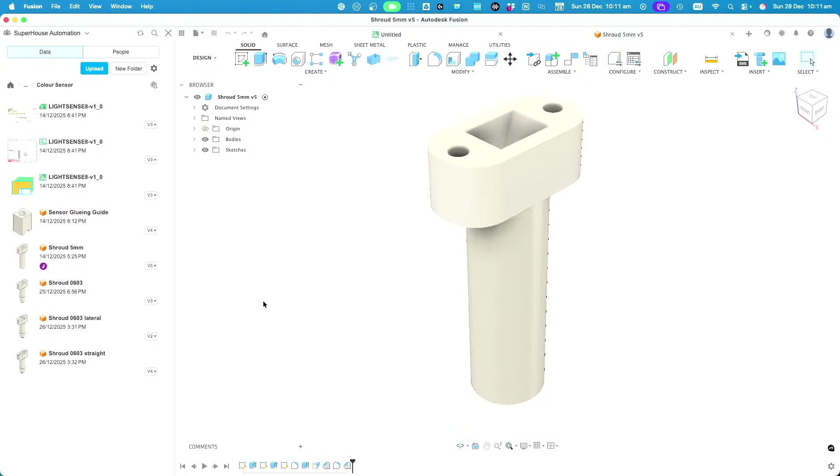Now let's see if this is going to work. I've got to remember how to drive all this stuff manually now that my magic buttons don't work. Okay, I'm going to go to that and hopefully, oh yeah, I think you can still hear me at least. And that. Which doesn't really work very well as a picture-in-picture, but oh well. With no scripts, that's the best we've got.

Okay, so I saw that there were some other comments back there. Wagon Load says, would a PGA work as a test point bridge? Programmable test point switchboard. Maybe? Oh, yes, I saw Wagon Load ask the same thing earlier and I missed it. PGA, so Programmable Gate Array, I think that stands for. Is that correct? Let's see. I'm going to check. Oh, FPGA is field programmable gate array, yeah, but what about just PGA? Is a PGA different to an FPGA? Maybe it's just the same thing. Yeah, okay.

Googling PGA just gets golfing sites. Yes, I know. Oh, programmable gain amplifier, says Tabraze. There are so many things it could be. That is what I'm talking about, said Wagon Load. Tinker says FPGA is field programmable. Yeah, but are there any that aren't? Maybe the original PGAs were not field programmable. They had to be done at the factory, maybe using a mask or something, and it was only later that they became programmable after fabrication. Anyway, what am I doing?

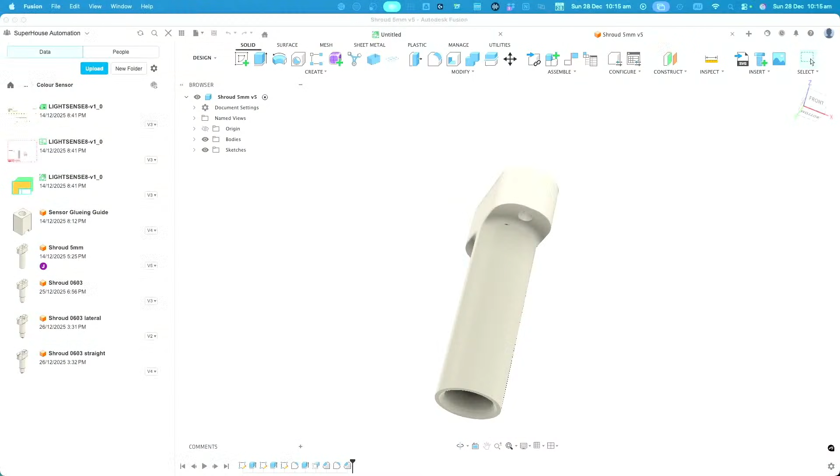Oh, okay, so Tinker says, original PGAs were like original PROMs, took fancy gear and voltages. So you'd need to use a high voltage programmer or something to set them. Paul, good morning, Adelaide. Wagon Load says, use PGA to make a software-defined switchboard for test points to choose which test points to route. Okay, this sounds like a far bigger rabbit hole than I want to chase in my current hazy state of mind. So I'm going to stick to the simple stuff, the things that my puny brain can comprehend.

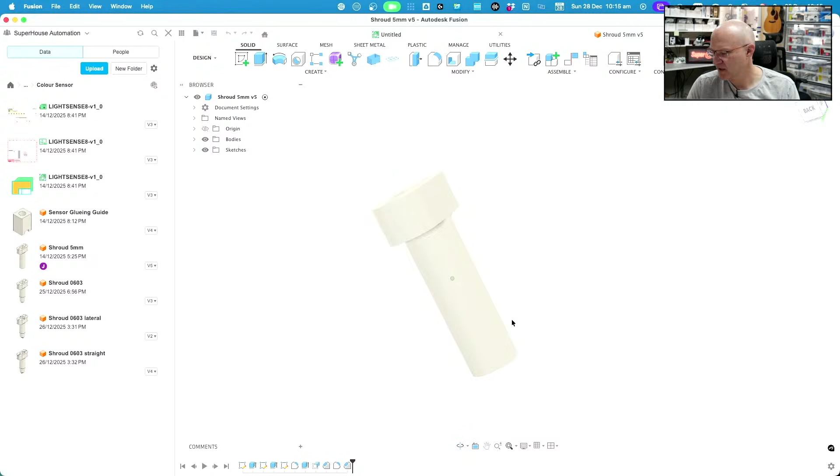So this is the test shroud for a 5mm LED, and this seems to work fine. So this is what we were using last week, and we were getting data out of the sensor. And since then, hang on, I need to mute for a second.

Bad. Overnight, my chest infection thing seems to have come back, so I've been feeling really rotten today.

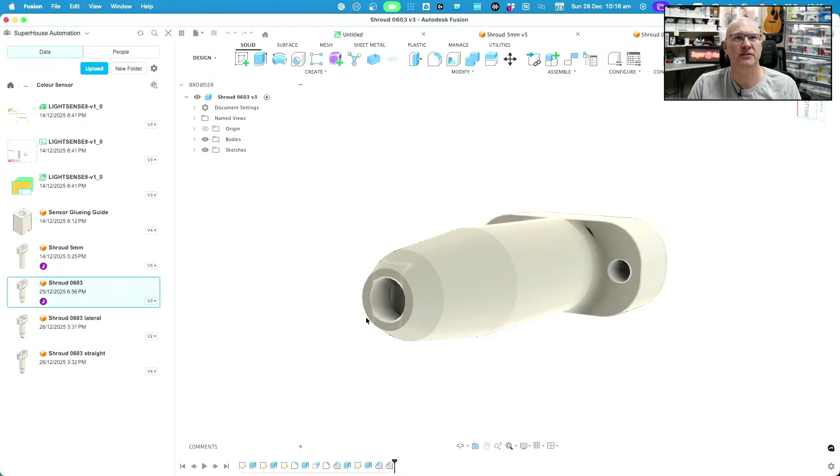So I then did this, which was a bit of a failure. Well, it would probably work. So this was my idea of making a shroud that would go over an 0603 LED. And I've printed a couple, I have right here. The problem is that what I was trying to do was make the geometry big enough that this circle will encapsulate an 0603 LED in any orientation.

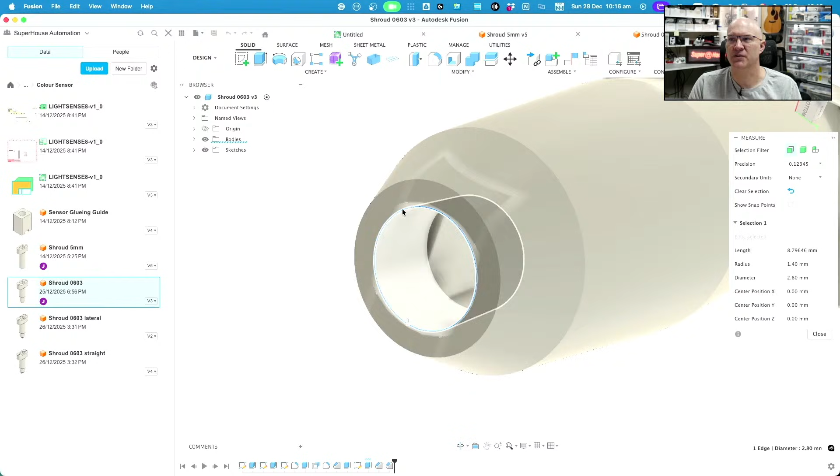So if we have a look at the diameter of that circle, it is 2.8mm, and then just in order to be able to print, this can't be super thin. The end point here has to be wide enough that the nozzle of the printer can do a perimeter or two around it. So I couldn't bring this in much closer. This is basically at the lower limits of dimensions of 3D printing with any degree of a clean result.

Beyond this, it just becomes a bit of a mess, at least with normal FDM printing. With something like UV cured printing, resin printing, you could get finer features than this, but this is getting down towards the limits.

So I did this, I printed a couple of them, and then I did some test fits onto a PCB. So I have a PCB here, and I'll show you what I'm thinking about how to do this, because my normal process of just hitting a button and getting the correct camera does not work. So how am I going to show this? Right here is an LED. You can probably just see it between my fingers, right there.

And next to it is the current limiting resistor, which is associated with the LED. Now, this is not a very dense board. There's plenty of space, but the current limiting resistor and the LED are right next to each other. What is the spacing on those? Not particularly large, not tight. Looks like it is on 2.5 millimeter spacing, approximately. Yeah, 2.5 millimeters. So the LED and the resistor are side by side, parallel, 2.5 millimeters apart.

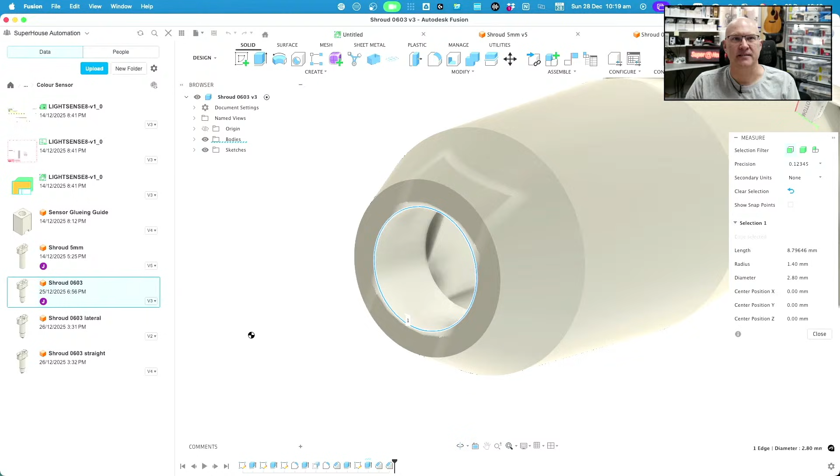And that's pretty normal on a board layout. If you have an LED, it's not going to be sitting in total isolation miles away from anything else with plenty of space around it. There will typically be other parts near it. And that means that if I'm going to put something like a light sensor with a shroud that descends over the LED and blocks it off, then it needs to be able to clear adjacent parts. And this doesn't. It kinda does.

Austins_creations said, you either need a resin printed part or TPU to help squish, seal. Yeah, potentially, Austin. Yes.

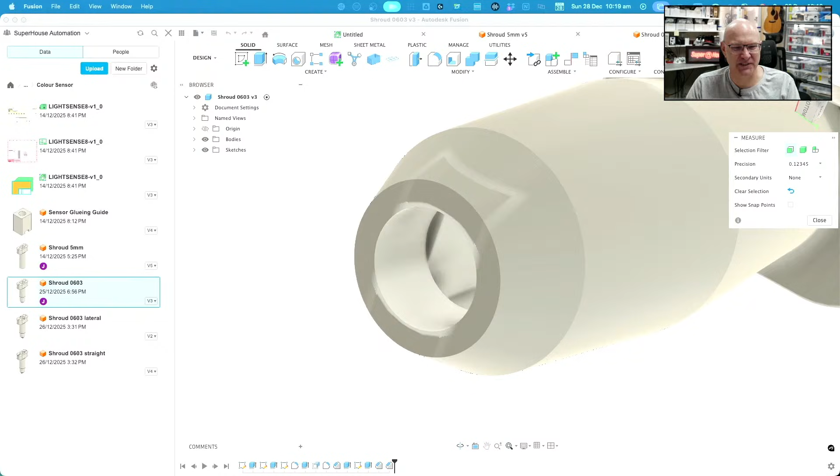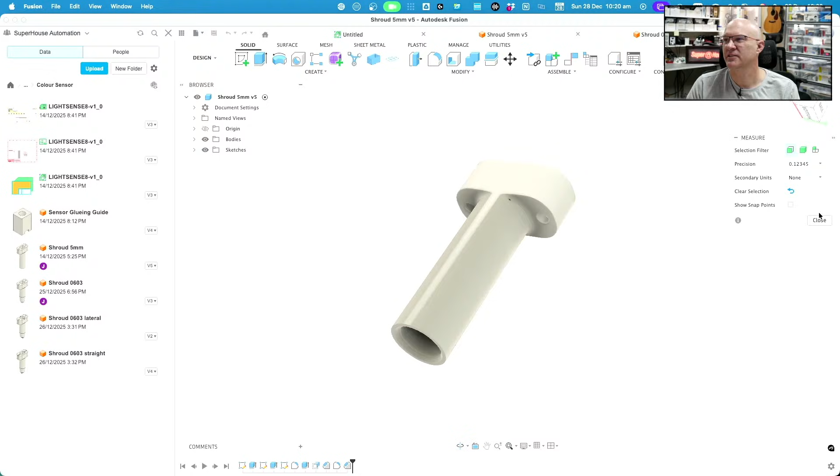So, where are we? Okay, so this was the progression. I did a test print of this part, and it does actually work. It fits over an 0603 LED, and it brings the sensor down. Now with this one, do I have a section analysis on it? No, inspect. Let's see, section analysis. Actually, no, cancel, I'm going to do it from the other way around. I want a section analysis on that axis. Okay.

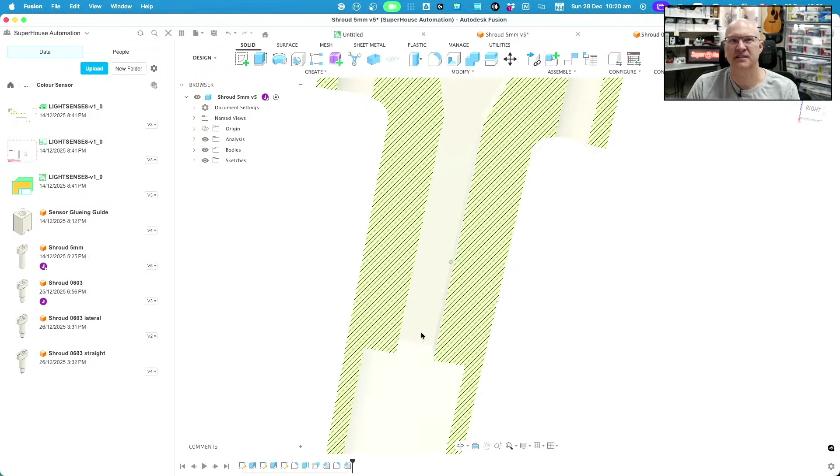So, what you can see with this one is the cable comes down from the back, and then the color sensor sits in the bottom of this cavity. The top of this is where the LED comes through. So a 5mm LED goes into this hole. It has a curved top, and the top of the curve ends up approximately where my cursor is, so it fits into that space neatly. The sensor goes just here, and that's why I have this gluing guide. I'll show you this as well. This gluing guide has a spigot sticking up on the inside.

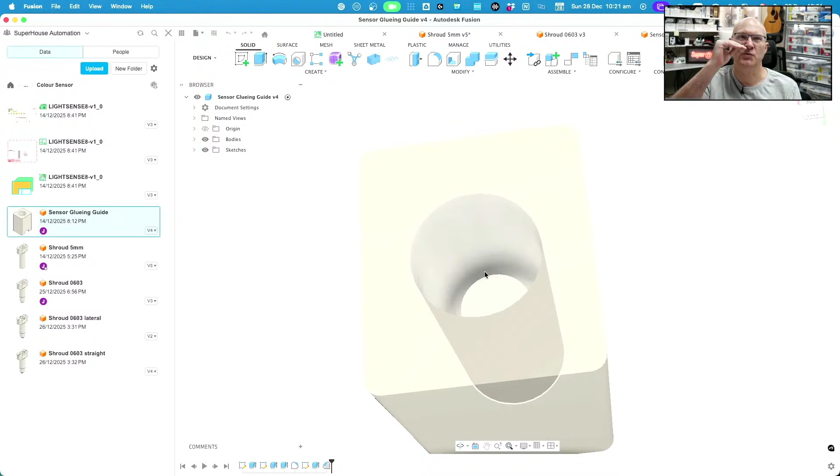So I printed one of these, and this shroud gets inserted into the gluing guide. That spigot goes up inside it, and it goes to where the LED would be, so it blocks off the hole for the LED. And then I can put the sensor down in here, and I know that when it hits that stop point, it has reached the end. And then I can put a bit of glue on the wire, and the sensor ends up in the correct location right there, because there's nothing else to stop it.

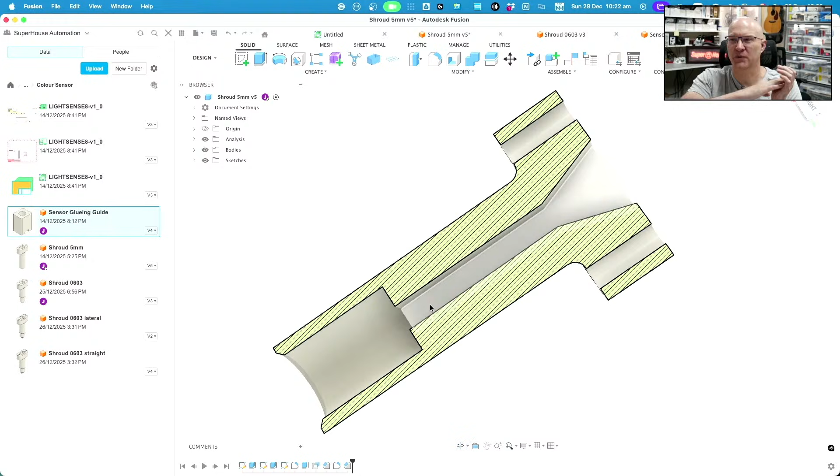Otherwise the sensor can just keep going straight down and end up in this area somewhere. Or I might not put it down far enough, and it might end up here somewhere, which would probably still work, but I just wanted a really consistent way of making sure that when I put the sensor into the housing, it ends up in the exact same place every time. So that's why the gluing guide provides this face. That face right there is what goes up inside here and acts as an end stop for putting in the sensor.

Very similar, yes. And ultimately I do want to do this with optic fiber instead of putting the sensor directly in here. But that is for a future iteration. I'm doing this in multiple stages. The first stage is to take the sensor and put it directly over the LED, but that means having a cable running down to it, and it means a shroud around it, all sorts of things. So ultimately what I want to do is make a little test module which will have a number of these sensors in it, probably 8, and then have optic fiber that goes to a shroud that goes onto the location of the target LED. The other end of the fiber goes up to the sensor, which will be in the centralized location.

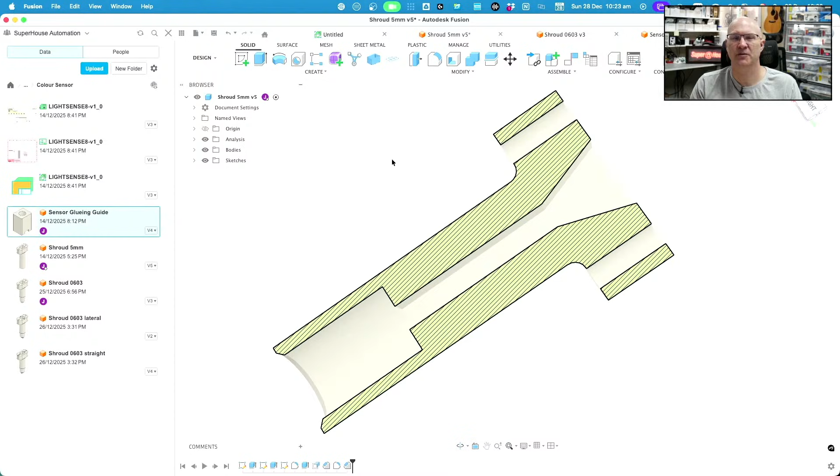Wagon Load said, would a fiber optic cable help direct the light from the LED? Yeah, exactly. That is the plan for the future, but that adds a whole lot of uncertainty and complication. So I am dealing with the simple case first, make this work, and then I'm going to start complicating the mechanical optical side of things.

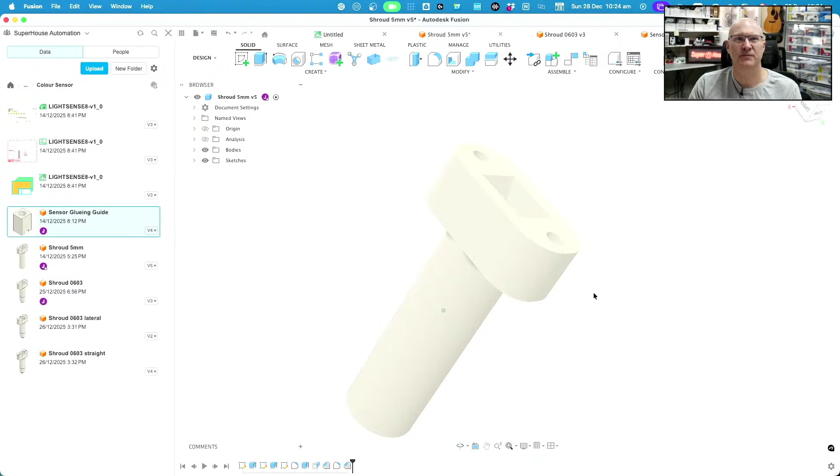So this version seems to work really nicely with a 5mm LED. So a round 5mm LED into this works just fine. And yeah, we had the software working for that last week, which is great. And this one, you can see that this whole thing is significantly smaller, because it's going over an 0603 surface mount LED, it's not going over a big 5mm through-hole LED. So this end is much smaller.

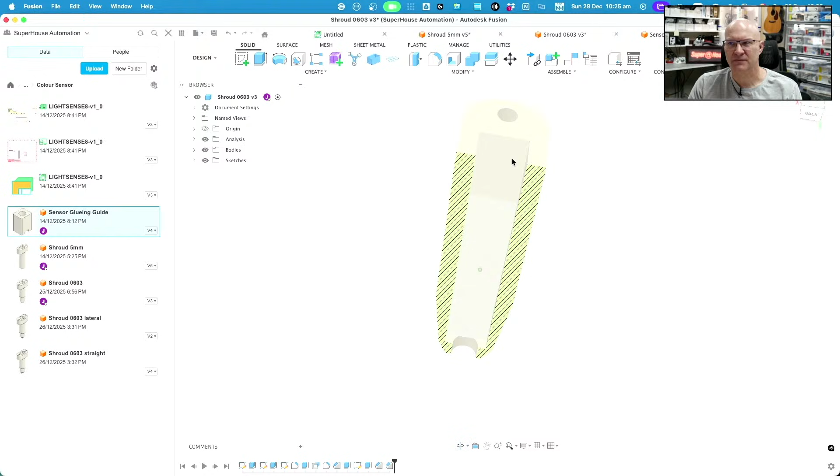The sensor, which direction should I do an inspection? Let's go that axis. Yeah, you can see that there is a flat point at the end here because the sensor is bigger than the 0603 LED. So it sits in the bottom. So what I'll do is put the sensor down with the wire attached to it until it hits the end here. It'll just sit against this little lip. The sensitive part of the sensor is in the middle of it. So it will then be exposed to this hole and then it can be glued in place. So that's the theory for this one.

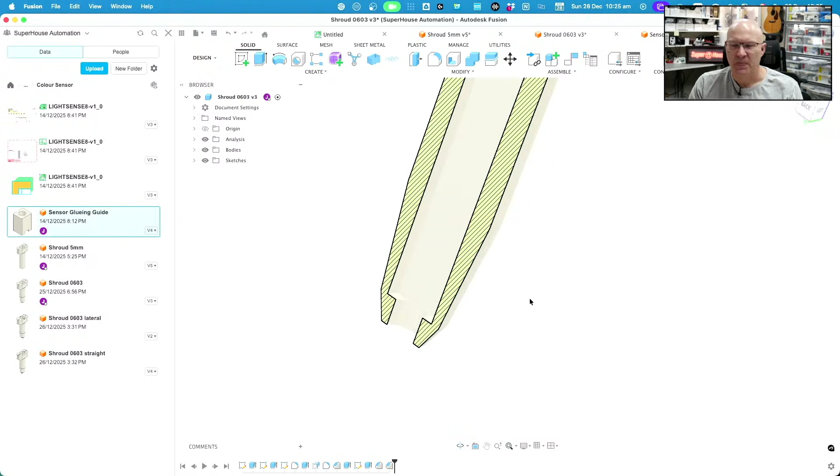Yes, but it just ends up being too bulky. Hang on. Sorry, had to cough and take a drink again.

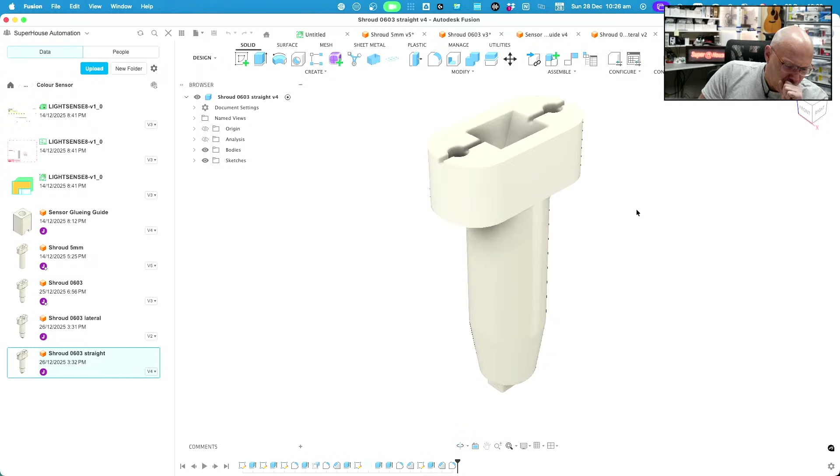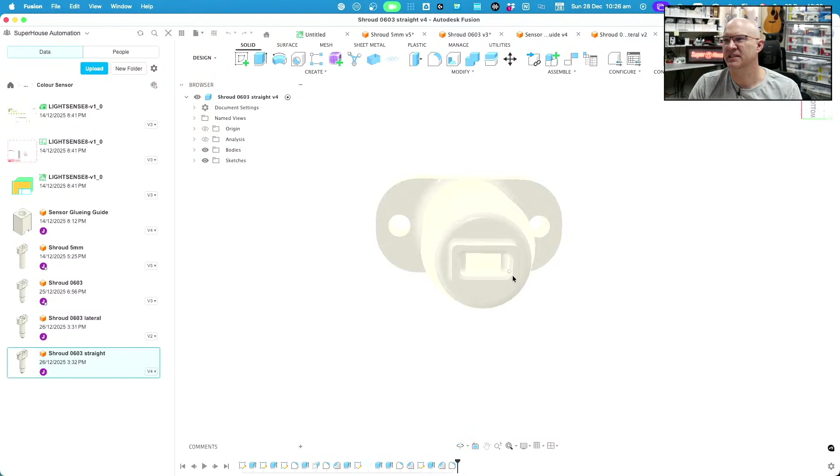So, this was a little bit of a failure. It would work if the LED was quite isolated and it wasn't near anything. But that's not reality. So I did 2 more. I did a lateral and a straight, and you'll see why. Whew, not good. So, instead of trying to make a round aperture that will fit over the LED in any orientation, what I did was specialize the orientation. So I have this one where the LED is aligned with the mounting holes, and you can see that it just goes that way. And then I've got this other one where the LED is perpendicular to the mounting holes. They're basically the same thing, but this aperture is small enough that it just fits nicely over an 0603 LED with a little bit of a gap.

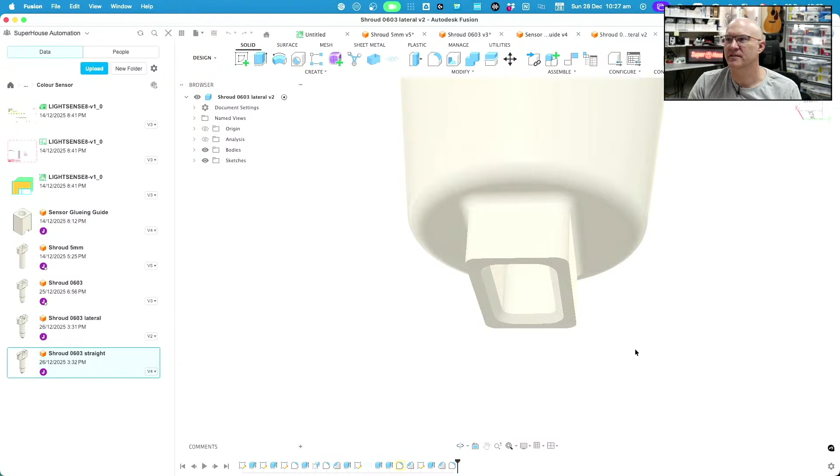There is a slight chamfer on the inside edge so that as it's going onto the LED, it'll tend to self-align. If it catches the edge of the LED, it shouldn't just sit on it. It should sort of skate off the edge and self-align to some extent. That's the theory anyway. And you can also see, this is a little bit of a silly thing, but yeah, I think it'll be helpful.

Tinker001 says, but what will you do for an array of 0603 LEDs? Oh yeah, that's going to be an issue. I haven't got to the ability to solve that yet. At this stage, it would probably require a custom shroud. So some kind of a shroud that has 8 sensors in it, or however many are required, and sits them all in the correct location. So it would be an array of sensors with an array of apertures custom made for that particular target device.

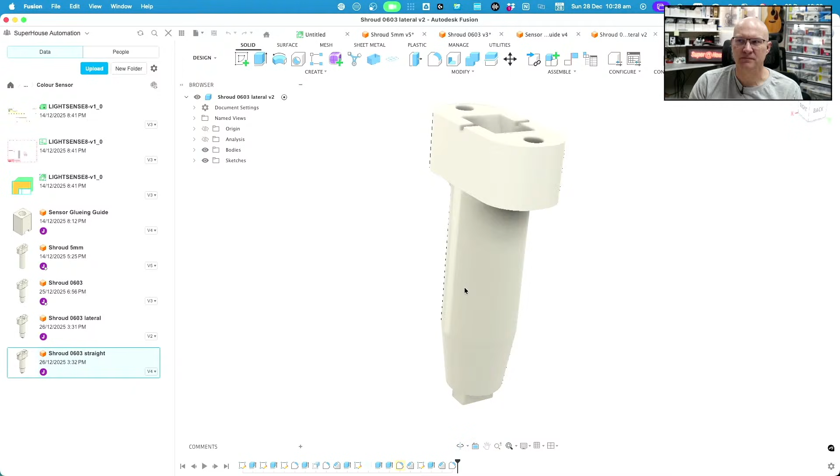But ultimately, I want to be able to do that with optic fiber. But for now, I'm not jumping straight to the end goal of the most complicated situation. I'm trying to solve the simple case, and then once I've solved the simple case, I can then start to expand and generalize it a little.

Yes, and as Tinker001 said, except that the sensors are much bigger than 0603. Yeah, they are, and that is the point. If I have an array of LEDs that are side by side close together, that is the point where I will need to use optic fiber. But I'm not there yet. I've got to make the basics work first.

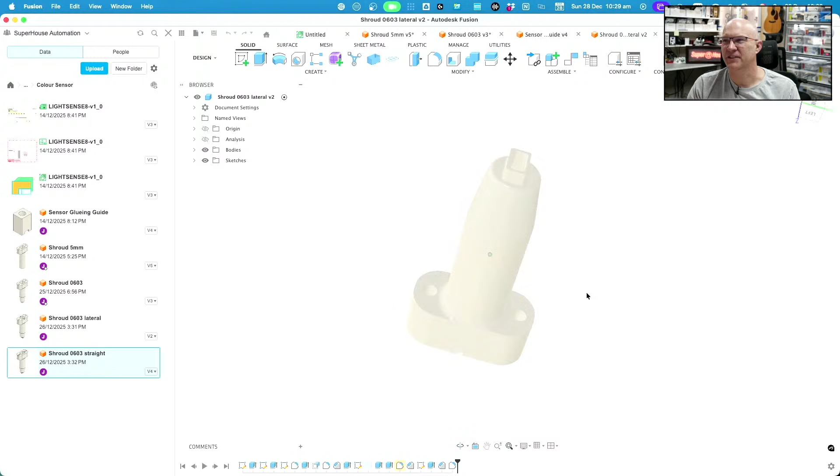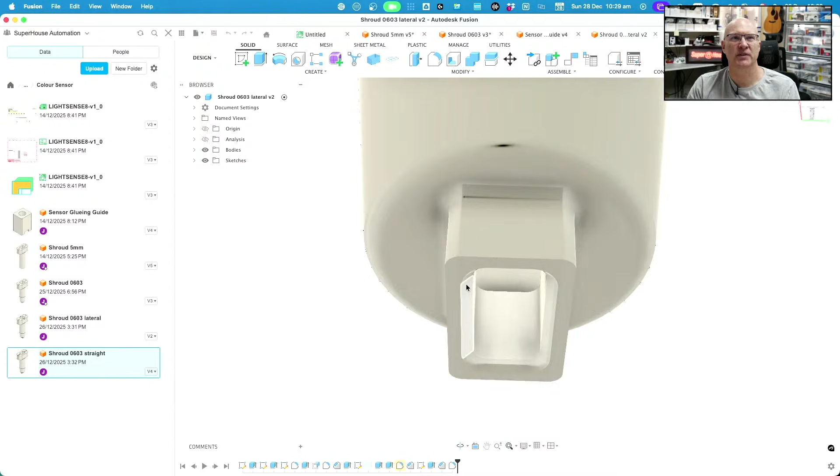So the thing with this is that because the body of the shroud is rectangular, it fits, not super tightly, but directly around the LED. If there is a resistor and an LED in parallel, directly side by side, the thickness of this side shroud is small enough. In fact, I don't even remember what it is. From that face to that face is 0.5 of a millimeter. So you can see the scale this is.

It's pretty small. To be 3D printing this, it's down at the lower limits of FDM printing. So 0.5 of a millimeter thick on those walls, which means that fillet is something like 1/4 of a millimeter across. And that is narrow enough that it will fit in between the LED and the adjacent resistor. So this will solve the problem. In fact, I'm going to come back to test modules, and test module, TMod, is it this one? There is one I was messing around with, module plates, yeah.

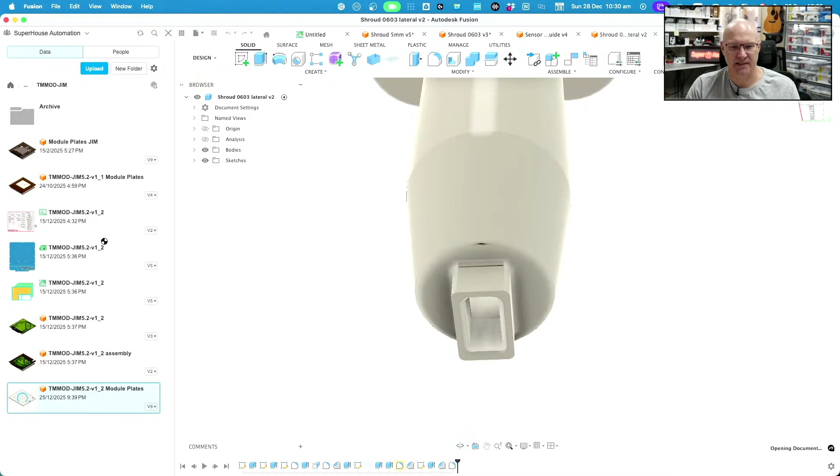Build them out of HDPE. HDPE? Make the LED shroud as a separate rotating end piece so you can rotate it to any angle. Yes.

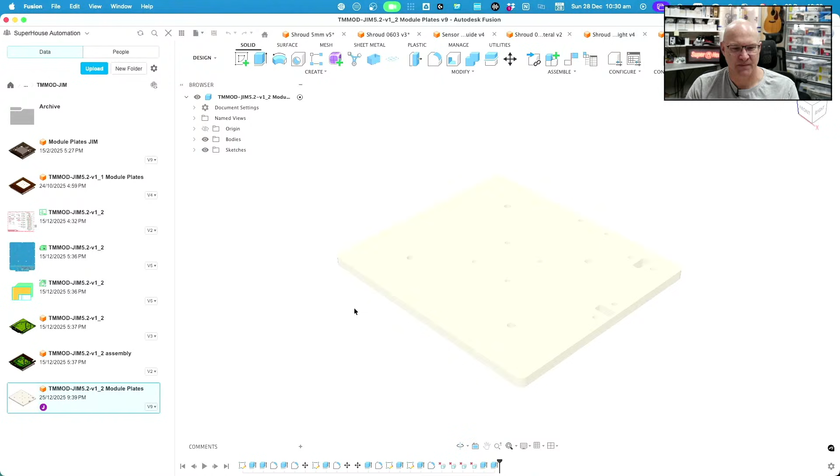Out of HDPE. Mill them. Yeah, that's true. I could mill them. So this is the pressure plate for, well, you're not really going to be able to see it properly, but for this board. It's the one that I've been using, this board actually, one of these. This is the one that I have been using as my test case.

So if I want to make it work for this board, that gets me to the starting line of having one board where I am testing an RGB LED and a regular LED. So there are exactly 2 LEDs on this board, and if I can cover the big 5mm RGB LED and the surface mount 0603 single color LED, that's LED sensing 101. It gets us to the base point and then I can start expanding from there.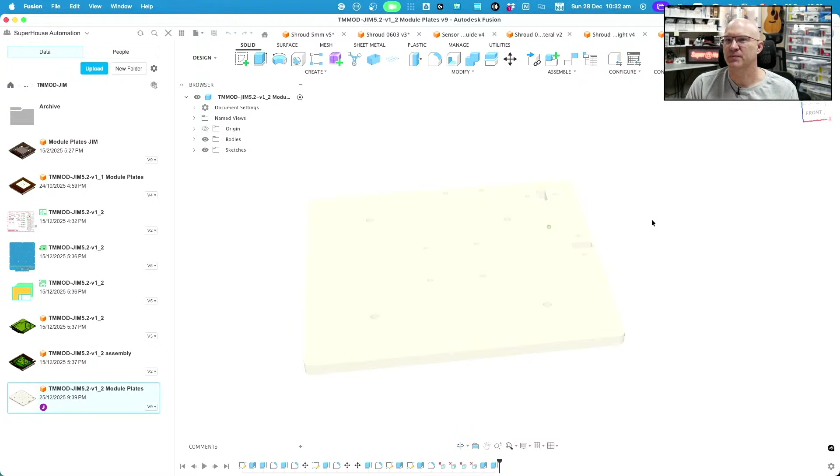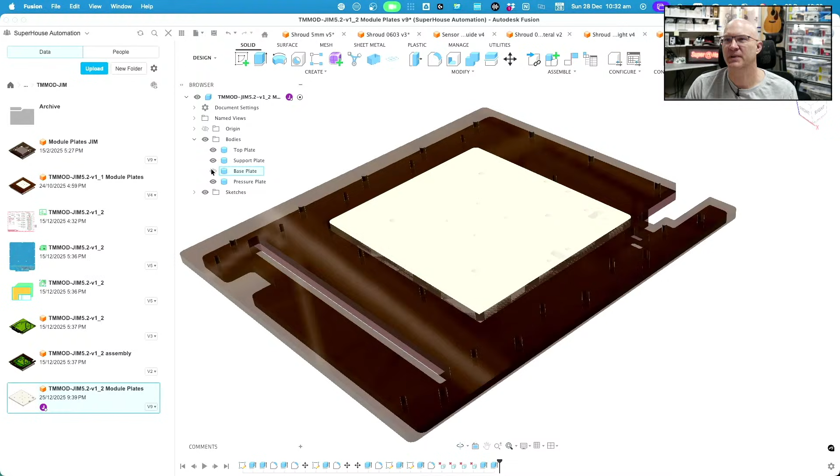So what you can see on this pressure plate, in fact I'm going to turn on, where are we, bodies, turn on a couple more pieces for it. So this white piece that you can see, this is the orientation of the test module. You can see the top plate, the middle plate and the base plate under there. I'll turn off the base plate and the top plate just to make it more visible.

So the pressure plate, that's interesting. Oh no, that's fine, that's fine. Sorry, I just saw the tab on the support plate coming in, intersecting where the sensor is going, and I had a momentary heart attack. But no, that works fine because that sensor is under the PCB and it doesn't obstruct anything. So that's cool, I think.

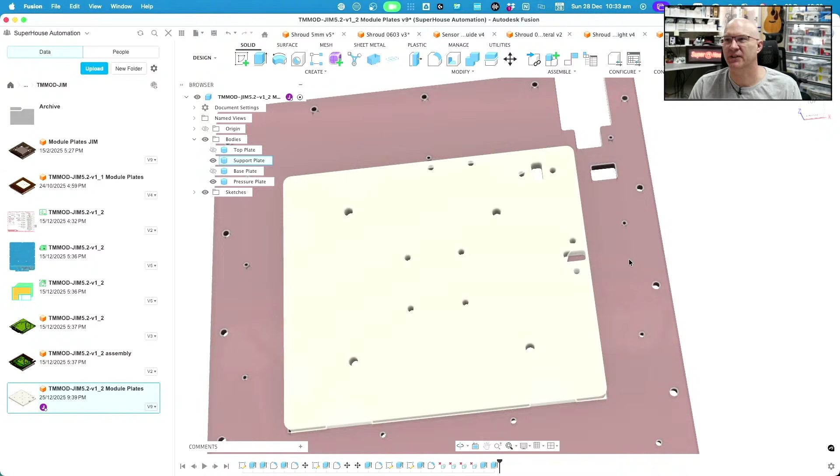Oh, actually no, I should do something about that, because at that point there are pins from the through-hole LED coming through. I need to relocate that little indentation notch so that it's no longer directly underneath. Now, a couple of things. One is that...

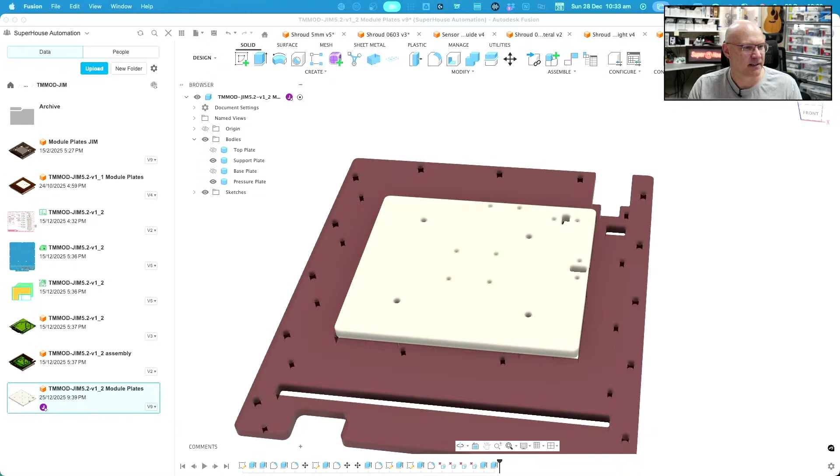Questions. Evil D said the Rainbow Buff LED array for Vorons has a pile of 0603 addressable RGB LEDs in a small space. Let's see what is going on with that. Oh, cool. Rainbow Buff. It's an eye-catching revival of the Voron Stealthburner printhead logo with rainbow backlighting. So, yes, testing that would be interesting.

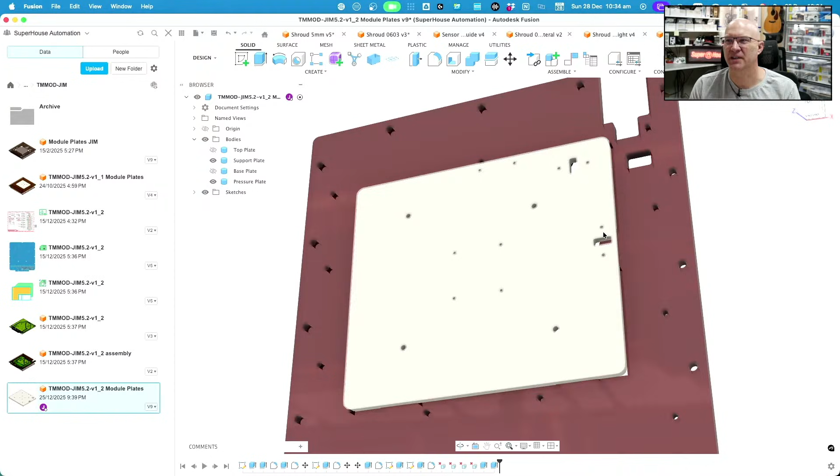Stretch goals. Yeah, I know I'm repeating myself, but as I keep saying, I need to solve the simple case first. Then I can start solving the more complicated cases. So, my goal is to solve the case for this board with a 5mm through-hole RGB LED and an 0603 surface mount LED. And that's it, nothing else.

Now there was a question. Oh, get out of the way. Sorry, there was a pop-up in the YouTube management interface.

John says, did we decide that a CCD sensor and image recognition was too difficult? Not too difficult, just a different way of doing it. And one that does have other complications. Yeah, we've talked about that a couple of times. One of the issues is

the camera would need to go on the bottom of the pressure plate, which is 30mm from the face of the PCB. So the back of the camera would be 30mm away from the PCB, which means effectively your focal distance is going to have to be something like between 10 and 15mm. So the actual camera is only going to see a very small part of the board.

And, sorry, my brain misfired because I was also half reading things in the chat. And now I don't know what I was talking about. Oh, I need to go back to bed.

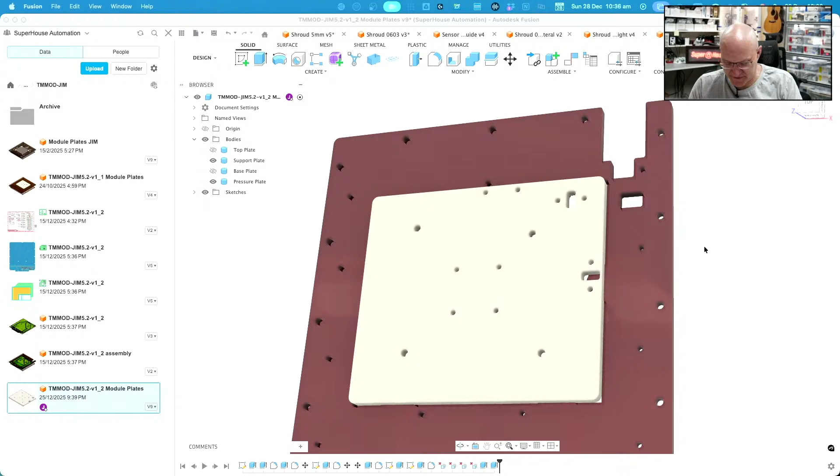What am I doing? I seriously have no idea what I was just talking about. No, it's gone, totally gone. So, yeah.

Okay, so I was starting to talk about the reason for doing lateral versus... Tinker001 said you were pointing out that cameras don't see through the plate very well. Ah, yes, that's right. The camera can't be above the pressure plate because there is just way too much stuff in the way. There is the big mounting bracket in the middle. There are the pressure pins that go down. Yeah, and thank you, Tinker. Yes.

So I can't mount a camera up high so that it has a view of the entire PCB. The camera would have to go under the pressure plate, and there is still the alignment issue. So if you have LEDs turned on, the LEDs will give you a bright spot, and also there are ambient lighting issues. What I would need to do is enclose the tester so that it is all blacked out, or otherwise I'm going to have things like reflections off the board.

If there are varying lighting conditions in the room the tester is running in, you might get different results, like different levels of illumination, because I don't just want to tell if an LED is on, I want to tell how bright it is. So I need an actual number coming back that can be used to look at thresholds and say, is it within an acceptable brightness range?

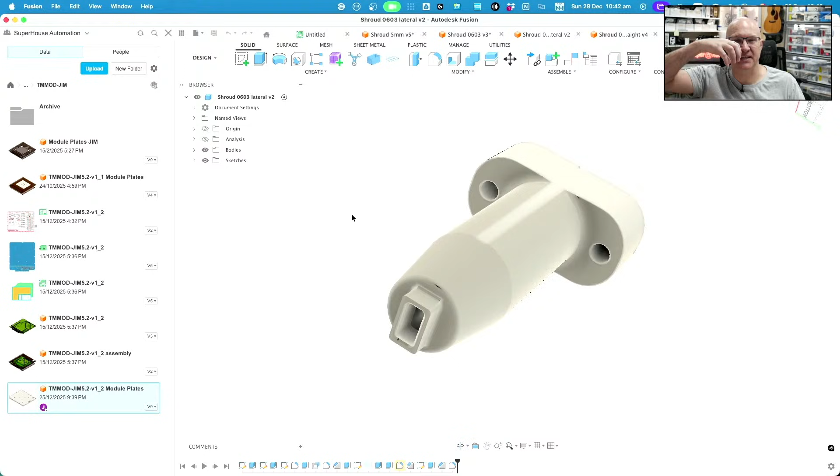Yeah, so it was actually my original plan to get a camera, stick it on the frame of the tester pointing at the board, capture it, and process it in software. These days, a lot of the time, if you want to sense something, the low effort approach is to point a camera at it rather than using a more specialized sensor.

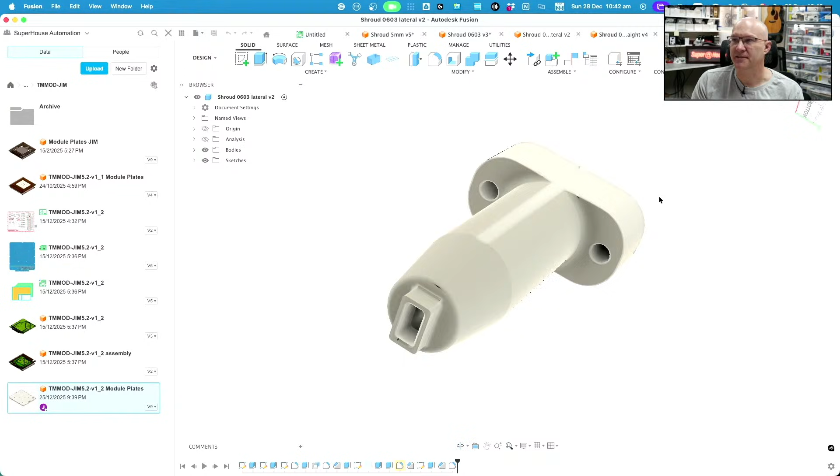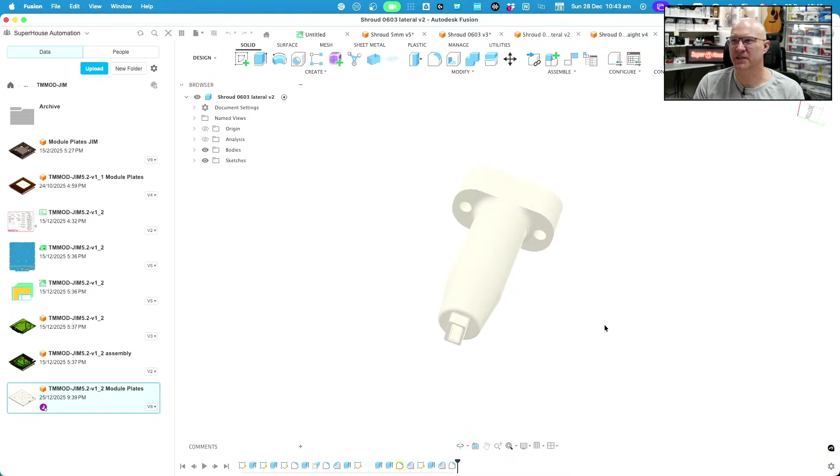But in this case, a camera is just a whole lot of extra expense. I don't know how big OpenCV is, but it could conceivably be like 1 million lines of code, rather than 20 or 30 lines of reading some I2C registers off a sensor that costs like $2. So anyway.

Andy said, well, yes, and at some point soon you'll also want to perceive PCB assembly test information, and that...

Amanda_RFT said, don't forget the nerd brag or achievement of the week. Aha! Mine is, I got the first version of the redesign of the 3D printed glass case done this week. Ooh, nice. Okay, I will get back to Andy's comment in just a second. Yes, Amanda, nice on the nerd brag. So if anybody else has a nerd brag they want to throw in, then go for it. So got the first version of the redesign of the 3D printed glass case. What was the glass case? Have I totally forgotten something that you've talked about previously? What project is the glass case?

So Andy made a very important point. I should preface this by saying I am not against taking photos of the boards or using cameras as part of the solution, and it is in fact my plan to do that. It's just not for this. So the important point that Andy made is at some point soon you'll also want to perceive PCB assembly test information that can only be captured via a camera. Yes, definitely. That is very important for things like detecting tombstone parts.

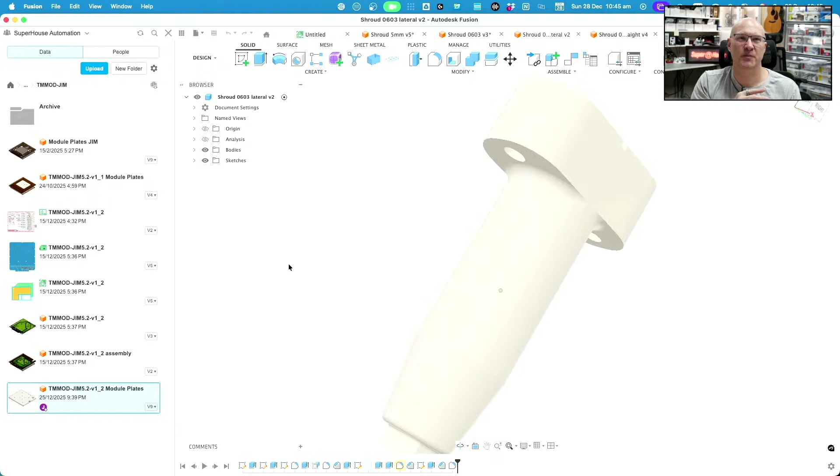So this is AOI, Automated Optical Inspection, and I definitely want to include AOI. AOI machines are incredibly expensive, starting point probably like $100,000. And I've been thinking about different ways to incorporate AOI. As many of you know, I have 3 KO pick and place machines. The third machine was never actually run. I bought it secondhand, and the previous owner bought the first 2 machines and was using those for board assembly. The third machine he specifically bought to build an automated optical inspection machine. That was the whole point.

His area of expertise is vision processing. He does lots of OpenCV stuff and custom vision processing algorithms. So the idea was that the PCB could come out of a reflow oven and go into that third pick and place machine, which would no longer be a pick and place machine. It would use the mechanical structure to move the camera over the PCB, take pictures of different parts of the PCB, which could be stitched together or processed independently, and then use a vision pipeline to detect tombstones or missing parts. That was his project, and then he ended up selling me the third machine as well, since I was there buying the first 2.

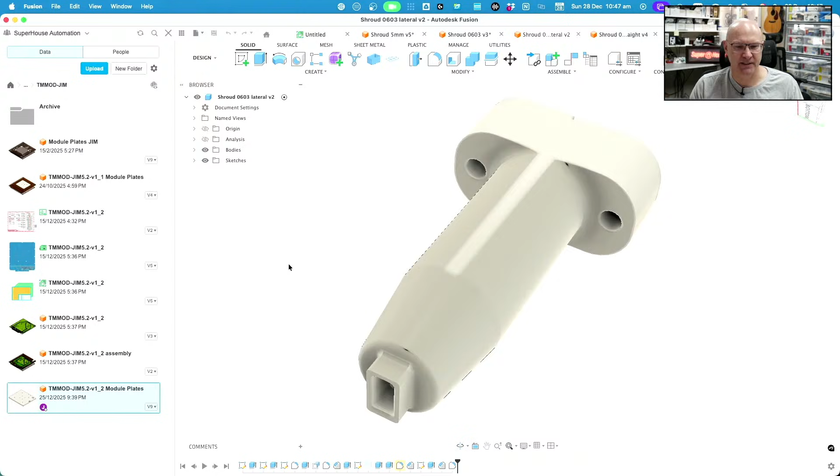Evil D says, KO seems overkill for that when a huge diode laser gantry can be had for less than $200. Yeah, but they don't have... Okay, I've got to change the view. They don't have a conveyor belt through them and other things. By the time you build the conveyor belt mechanism and everything else, it becomes a lot more of a project than just an XY gantry.

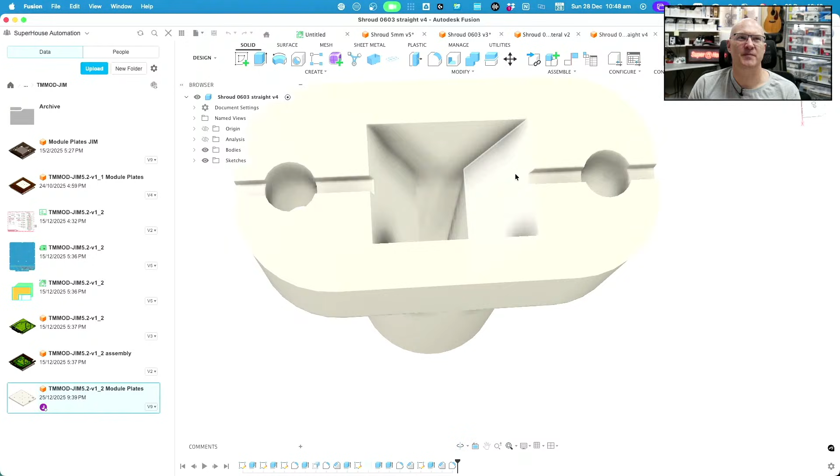So where am I? Which one is this? Lateral and straight. You can see on the back of them I put a little ridge, so if you're looking at it from behind, you can see the alignment of the LED. On this one, it goes straight. On this one, it goes lateral. I was actually thinking about doing a multicolor print and making this yellow or something, so that if I've got a pile of them, I can just glance at it and say...

Tinker001 said, don't know anyone with a mostly built board conveyor design. No, don't know anyone like that at all.

Yes, and also the other thing is that I already take photos of all of the boards. But that is done in a light box, not in the test jig. The problem with trying to get photos in the test jig is there's just too much stuff. Once the PCB is loaded in this test jig, you can't see anything from below it, so you can't get a bottom photo, which I need.

And looking at it from the top, you've got the pressure plate with all the pins, you've got the mechanism in the middle, there is all sorts of stuff there. You cannot get a photo of the top of the board either while it's in the test jig. So while it's in the test jig is not the stage in the process where it is optimal to do optical inspection. That needs to be done at a different stage of the process.

So at the moment I have, in fact, let me see what I can find here. I have thousands of photos of PCBs. But that needs to be done in a light box with the board supported in the middle of the light box so that there is a bottom camera and a top camera, and you can photograph both sides.

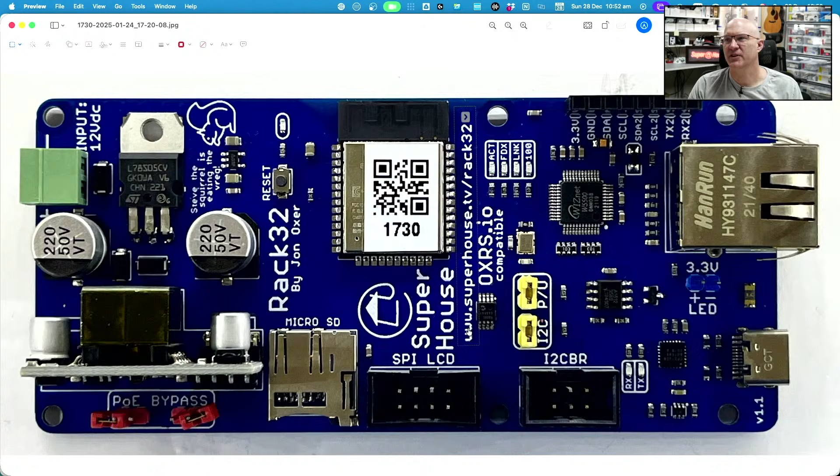So this is 2025 images. So this is 24th of January 2025, serial number 1730. Hang on, I've got to bring it back up on here. So this is a photo of a Rack 32, obviously. You can see the serial number there, it's got the QR code. You can try going to it, but you won't get past authentication. If you try going to that URL, I think you'll get an SSL error right now. That goes to a URL which is a redirect to the real portal.

So this photo was taken in a light box. The board is just put in there. It's got LED strips inside. There is a lid on it with a hole. And what I do is, at the moment, I sit my phone on the top of the box, and the hole is oriented so that the phone's camera is directly over the hole. And take the photo, and it then gets synced by Dropbox.

Then it gets run through an automated processing thing that crops the image in. So it finds a bounding box of the object in the image, and it adds a certain number of pixels all around it. I can't remember how many it is, 20 pixels or whatever. So it adds a slight boundary. It crops the image. It finds the QR code or barcode. It can work with either, and then extracts the serial number, and then it renames the image with the serial number prepended.

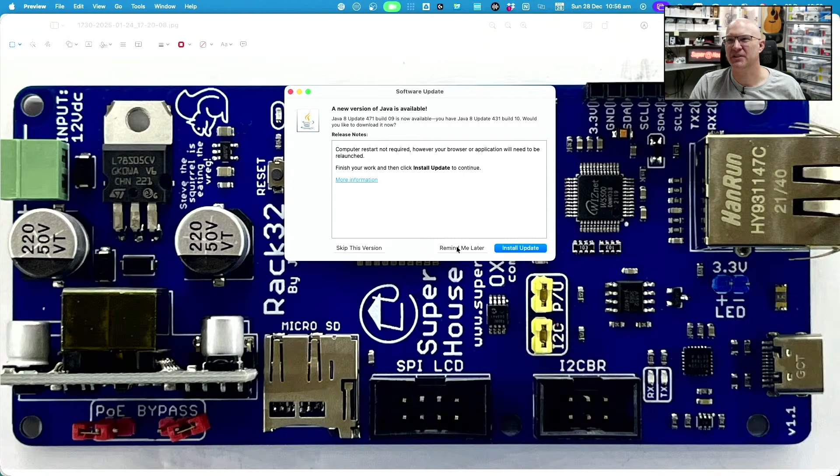Aha, the weekly stupid Java update that fails every single time. The only thing I can do is remind me later, because skip this version and install update both cause explosions. So it is deferred until 11 o'clock next Sunday, so it'll come up in the middle of the next live stream.

So anyway, my point was, I have photos, a couple of photos of boards. Oh, hang on, what was back there? Oh yeah, these are interfaces for the UT61E, the multimeter interface. Many, many boards. So I have photos of almost all boards that Tom and I have assembled in the last 2 years or so.

But it's not practical to take photos of a board while it's in the test jig. It has to be done before or after. And I think it was Amanda who pointed out, after the reflow oven. Yeah, so what would be nice would be, there needs to be 2 stages of taking photos.

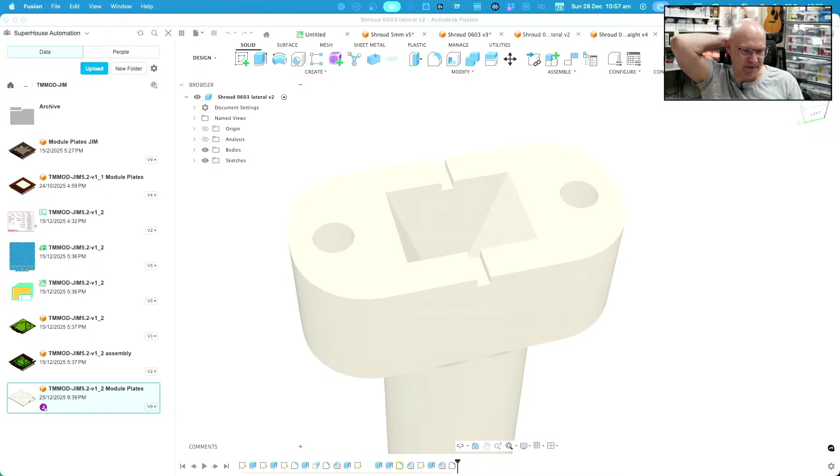Henrik is asking, who messages you? Is it something important? It's Amanda sending me pictures, and I haven't actually stopped to look at what they are. Oh, I just opened Facebook to check the messages, and hang on, I'm gonna bring this up on screen because this will tickle a few people.

Look at this. Yeah. TE number 15. I have that one. Someone's been looking for Talking Electronics issue 15. Finally got number 15 mag. Found this one in New Zealand a week after I found one in AU. Goes with my original folder of 1 to 14.

Yeah. Now, I'm just going to check what it was. Oh, okay. Login. So Amanda just sent me a screenshot of what she gets when she goes to that QR code. Yes, that's right. So if you actually had privileges to log in, you would see info about that board. What was it? 1730. Portal, device 1730. Am I authenticated? I am not.

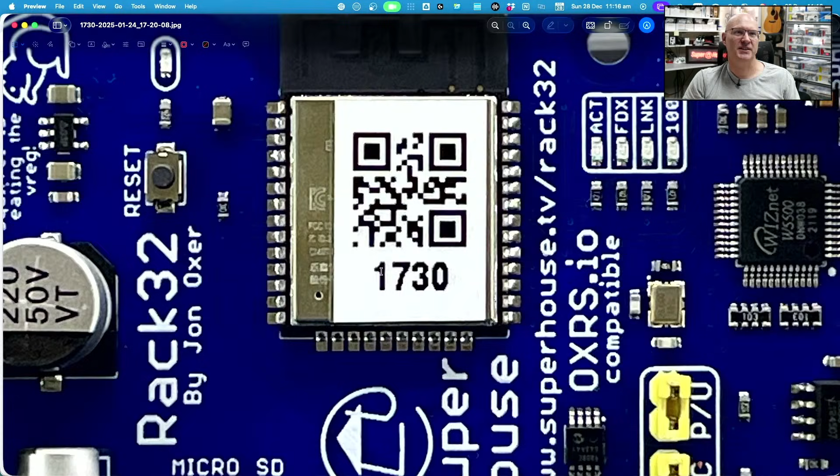So these are chemical resistant, thermally stable, long life, abrasion resistant labels that I'm doing in a Brother industrial label printer. And the Brother software does auto serial numbers and does all of the tokenization stuff that I need. So down the bottom where it says 1730, that is the serial number. But this QR code does not just say 1730. If you decoded that QR code, it would actually be d.superlab.au/1730. So it's a URL with the serial number as the argument.

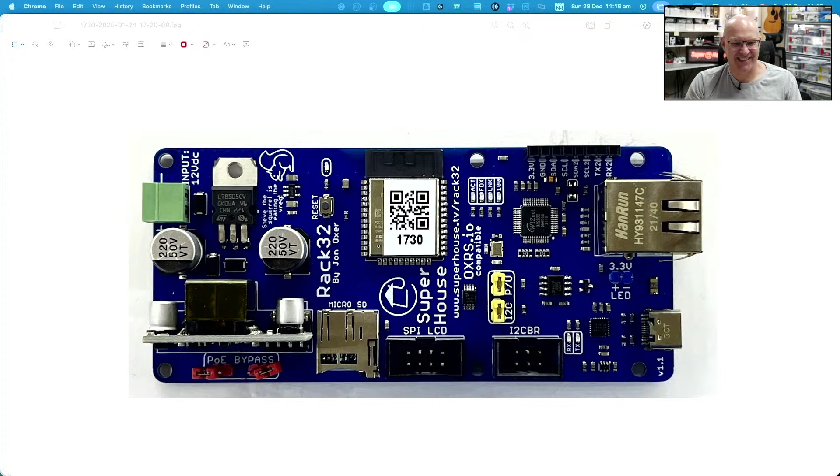Austin says QR code needs login. Yes, exactly. And Grant says, can you put the special characters in the unique number field? Oh, that's interesting, I hadn't even thought of that. So what if we come back to here and go 2D barcode, unique number field? Oh, no, the unique number field is not something that you can change. That is something that gets added by JLC, I think. I don't even know what it comes from. So you can specify the prefix, and then leave their unique number in the middle, or remove it. There's no box for me to enter what the unique number is. I don't know what the point of that is.

Starting value, incrementing number, yeah. So it is very close. It would be really nice if when you had QR code selected... Now I would understand 2D barcode and number, does that allow anything different? Oh, I see, no, it's just whether it prints it underneath.

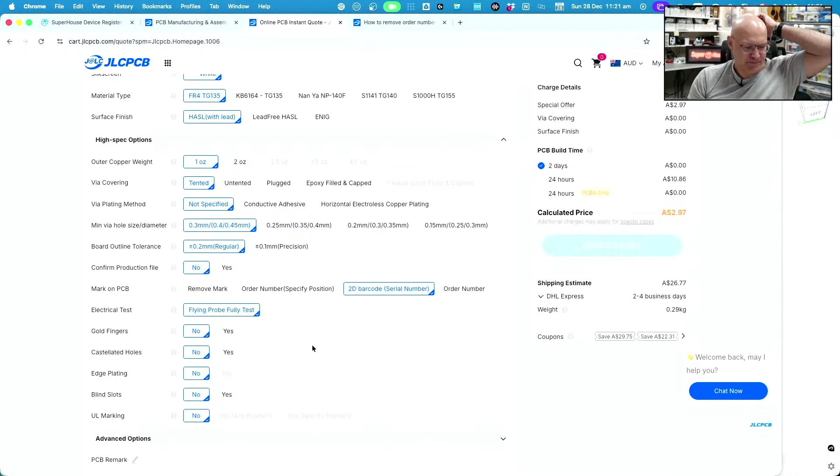Yeah, so it would be cool if I could do that through JLC. It would save me putting stickers on the board, but it would actually introduce another issue. I would have to change my process for keeping track of serial numbers and pre-allocate blocks. And those blocks may never be used. Some of those boards might be disposed of, or, you know, life happens. So I don't care in particular about having holes in the serial numbers.

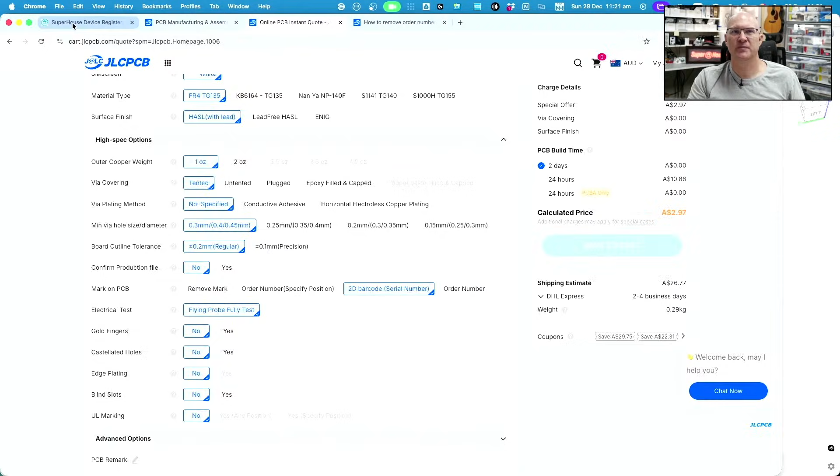At the moment, I don't have holes because boards are only assigned a serial once they are assembled. There is a stock of PCBs. A PCB gets assembled, we end up with a board, it gets a serial assigned to it, and therefore the next one that's made after this is going to be number 1731, and then the next board is 1732, etc. And it doesn't matter what order you assemble boards. You might assemble product A, then some of product B, then some of product A again. The numbers are just consecutive, no gaps. But yeah, I don't care about the gaps. That's not really the problem.

Wagonlight says, can you use the substitute character that replaces the slash in URLs? No, it just won't let me enter anything like that.

Tinker said, it was bad word blocked again. I don't know why.

Serialization at assembly simply makes more sense anyhow. Yeah. What would be really nice would be either an automated sticker application machine or some kind of a laser-based process. So one of those. Anyway, this is far removed from testing, from reading from these things.

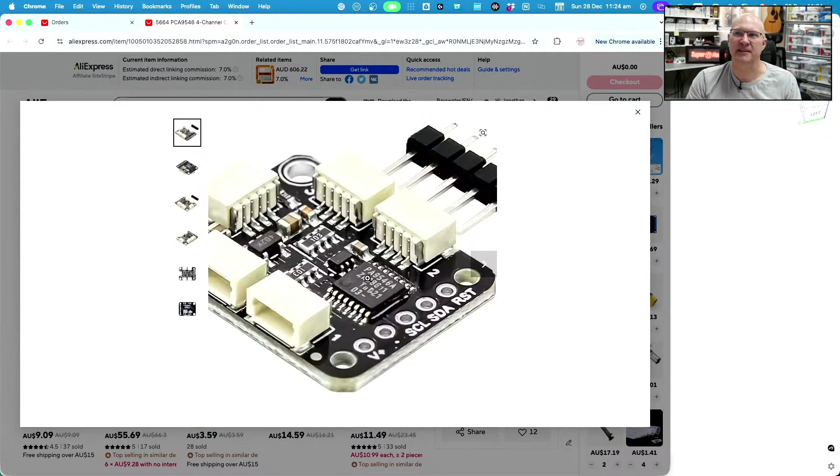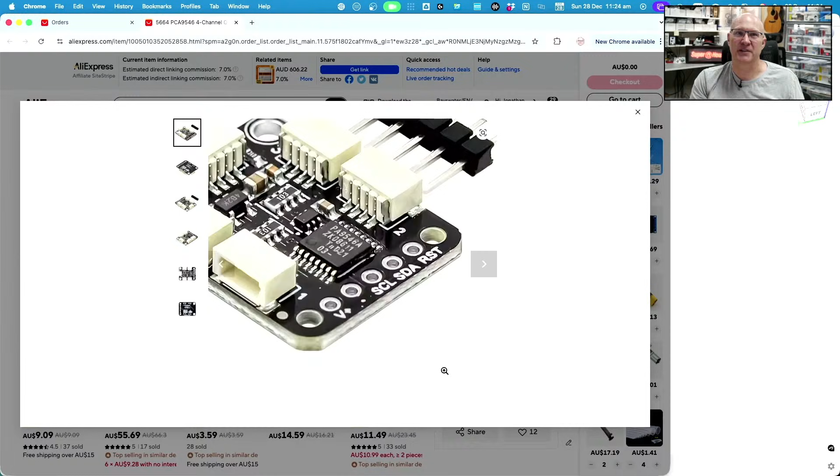It is this. I will bring this back up on screen in just a jiffy. Okay, so this thing. So this is an I2C multiplexer. And you may be familiar with these because we've been using these already in Testomatic. So right now there is an I2C multiplexer to select between the different I/O blocks. So each of the I/O modules on the Testomatic can have the same I2C address. They may not, they may be different, but it's possible they are the same. Therefore, there is an I2C multiplexer that allows selection of them.

And so what this little module does is it's got the upstream I2C connection here on the end, and then it has 4 downstream I2C connections with Qwiic compatible connectors on them, and a 4-way I2C multiplexer. And you can also see that it's got a couple of 10K resistor arrays here. So those are the pull-up resistors on SCL and SDA. There's a voltage regulator, I believe. What else is on there? Not much. It's really just a way of connecting multiple devices. So if you had multiple Qwiic devices, or what is, I can never remember it, what is Adafruit's equivalent of Qwiic? It'll come back to me.

Tinker001 said, post the URL, Jon. Post the URL. The URL for what? What about the first 4 digits is the board model and the remainder is the board serial number? Yeah, but the problem is I want a URL because I want my customers to be able to just point their phone at the board and click on it and pull up the history of the board.

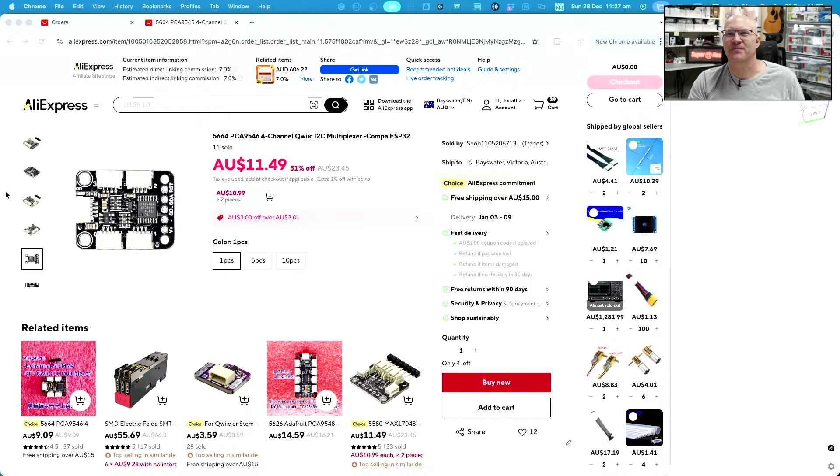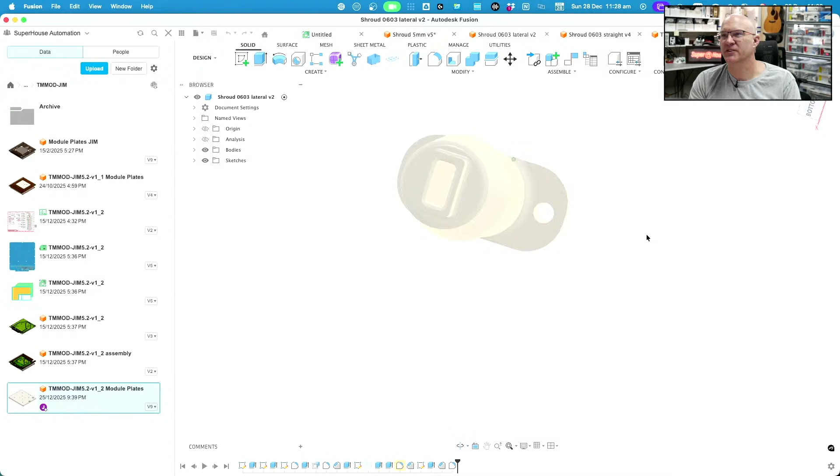So this is what I have in my hand right here. It's this board. And if we come back to, where's the pressure plate? This one. Now, what we have here is, just move some stuff out of the way because I've got things all over the bench in front of me. Now, these 2 areas here, this here and this here, are for mounting these shrouds. So one of these, actually not that one, in fact let's just close that one, don't need it anymore. Like one of these ones. So one of them will have an 0603 sensor, and the other one will have a 5mm sensor. So that one, 0603 sensor, this one, 5mm RGB sensor.

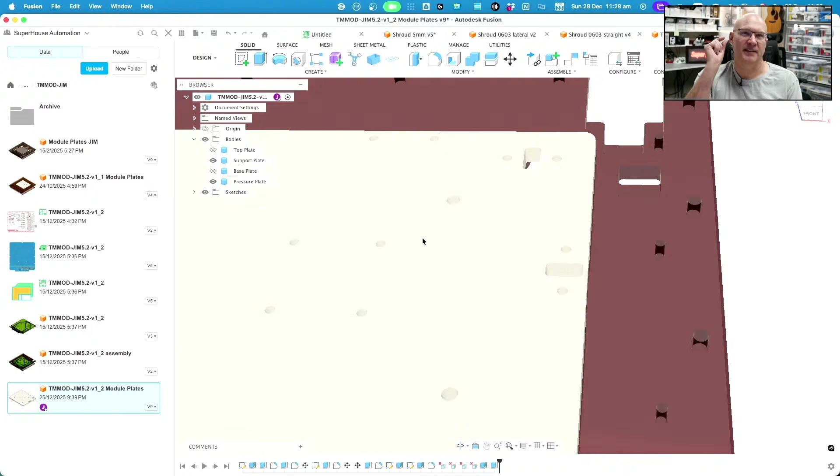So coming up through these slots, the reason that they've got the slot in the middle is so that the JST connector on the end of the sensor can fit up through there. So what I can do is poke the cable up with the connector on it, comes up through that slot, and then it gets screwed in place so that it sticks down underneath the pressure plate with the cable coming up above. So then we have two cables coming from two color sensors, and they need to be connected somewhere. And also you can see here these holes, that one and this one, this one and this one, are for the pressure pins that go down onto the top of the PCB.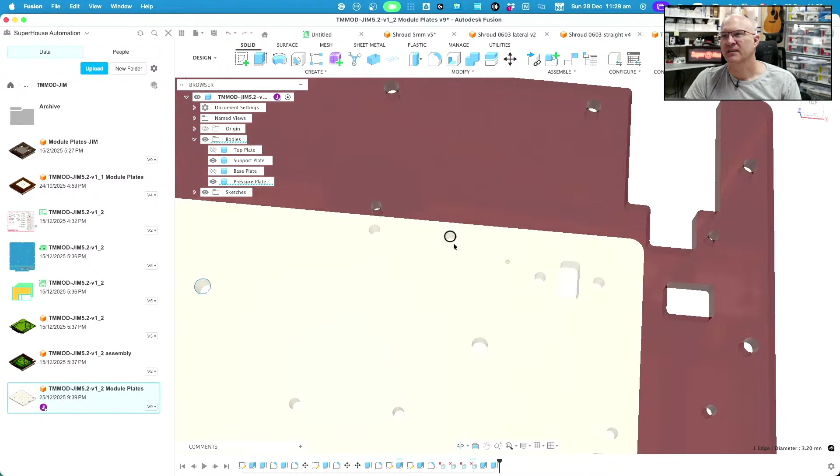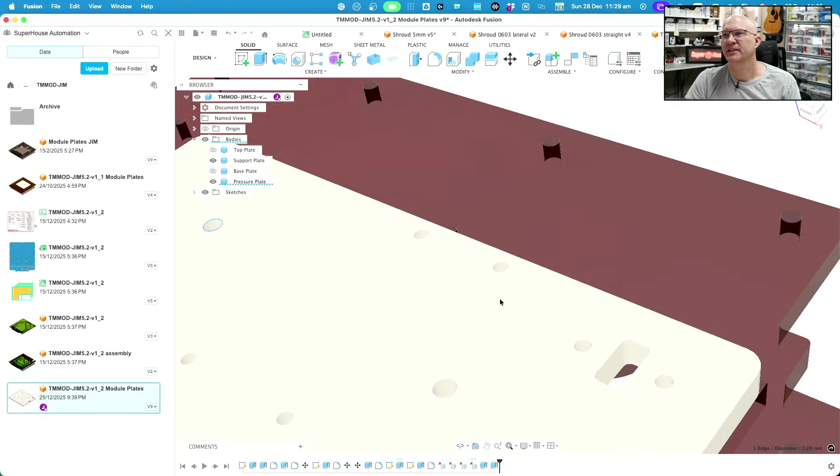These holes are for mounting the magnetic latch, which attaches the pressure plate to the gantry mechanism. And these two holes here, right there, are, now I've got to find it again, where is it? Are the holes that match, oh come on, that and that. So this little module can be screwed onto the top of the pressure plate. In fact, what I would do is put a little spacer in between, like maybe a 2mm spacer, and put some M2 bolts through. So there is going to be the module attached to the top of the pressure plate.

These two sensors will plug into that module, and then there will be a flying lead that comes off the end of the module, which will be against this edge of the board, that will loop around and go to a Qwiic connector socket on the test pin breakout. Sorry, the test pin carrier board. And that is why there is this. So this is for a vertical format, and this is for a horizontal format Qwiic connector. And I've put them both on because I don't know which one I want to use. And if I go to, do I have it here? Is that the latest one? Is it? I don't know. Let's find out. Let's just open it and see what happens.

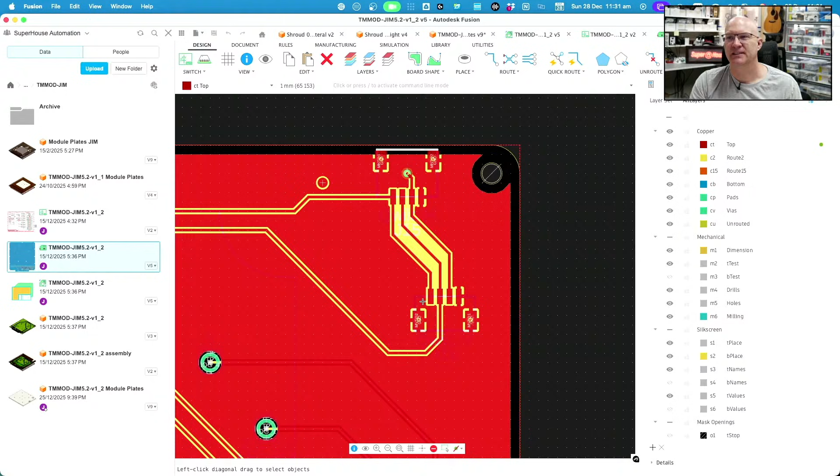Is it? Yes, okay, it is. So in the back right corner, you can see two footprints. This is for a vertical Qwiic connector, and this one is for a horizontal Qwiic connector.

So those cables get exposed, actually, no, coming back here. Do I have an assembly? I don't think the assembly has the, oh, that's a version 1.1 assembly. I haven't done an assembly for version 1.2 of the breakout yet.

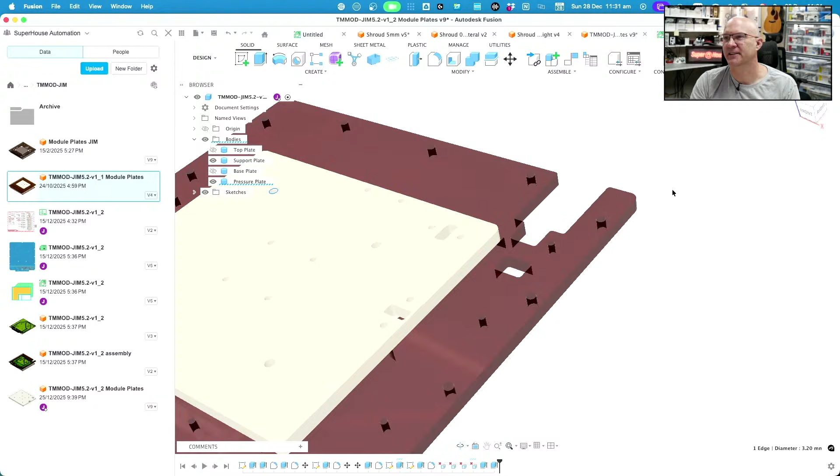Yeah, so that's where the connectors are exposed, either vertically through there or horizontally through there, with room to get your finger in to insert or remove a cable. So the cable will loop from that point over onto the I2C multiplexer, and then from there be wired out to the color sensors. And that way the Testomatic can use I2C to use the multiplexer to select which color sensor it wants to talk to and read values from it.

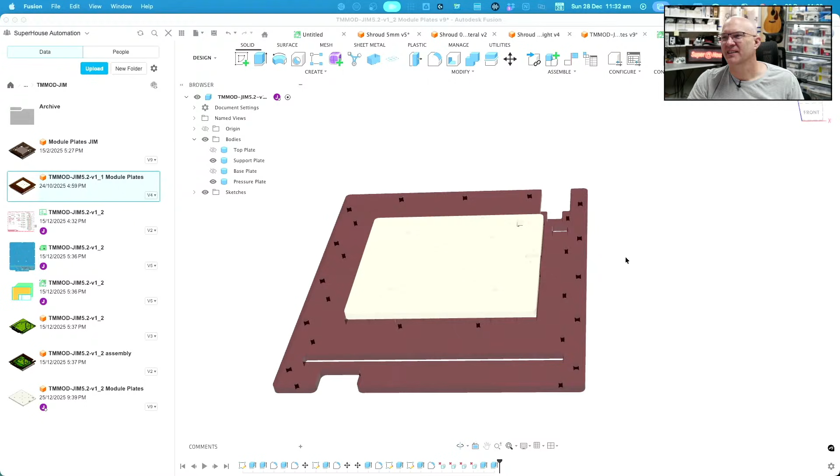I2C smoke detector on the pressure plate. Paul says, do you have a magic smoke sensor? Oh, nice. That's an interesting idea. A smoke detector. Well, in theory, the current sensor should catch smoke emissions.

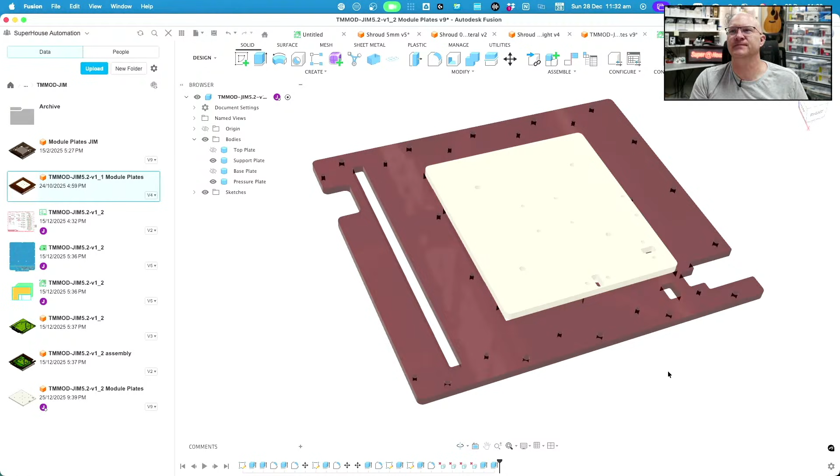Oh, here it goes again. Oh, lungs not behaving.

Yeah, so current sensors on the power rails that go to the device under test should allow detection of dead shorts and then killing the power very quickly to the device. Paul says you might not want to test that. Yep. Austin says, I think a thermal camera would be more effective than a current sensor. Yeah, so the whole thermal camera thing, back to that.

Yes. Now, this is where things get really tricky, because I do want to put a thermal camera back on this, and we did all of that thermal camera stuff ages ago with the I2C interface to the thermal camera, pulling the array of temperature data out of it and then generating a PPM image of the board showing temperatures. And it has the same problem as trying to get a visible light camera to look at the device under test. There's just stuff in the way.

So this is a problem that I'm kind of deferring because I don't have a way of dealing with it. Yeah, as Tinker001 said, now we're back to the problems with making a camera see through the pressure plate. Yeah, exactly. And I don't have a solution to it. Taking good RGB photos, like visible light photos of the board in a light box is easy, relatively.

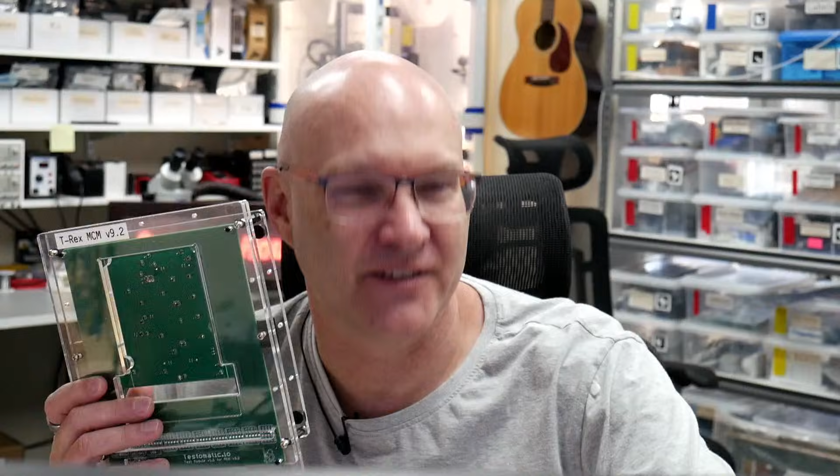But taking images of the board while it's loaded and under test, and when I say loaded, I mean under load. So if, for example, you had a motor driver, perfect example, I don't have one in reach, but this is the test module for, in fact, no, I forgot those buttons aren't working. So this is the test module for a board with high current motor drivers on it.

And on the back, those big white wire wound resistors are wired through test pins to the outputs of the motor drivers. So the point of this is that I want to be able to run the motor drivers into these dummy loads, essentially. So these dummy loads are going to get warm and measure the current. So I need to be able to see that the motor drivers are working.

And I can characterize that by running the motor driver into the dummy load, and there are voltage sense points on both sides of the load. And there's also current sensing. So what I can do is make sure, yes, this motor driver really is getting up to voltage, it's outputting the correct polarity, the correct amount of current is being drawn, etc. I can measure all of that.

And what I really want to be able to do, so this is the underside of the test module with the dummy loads, I want to be able to have a thermal image from the top so that I can see the temperature that the motor drivers are getting to. Because what I would probably want to do is load them up and run them loaded for some period of time. Like it might be 10 seconds, or it might have to be longer, I don't know.

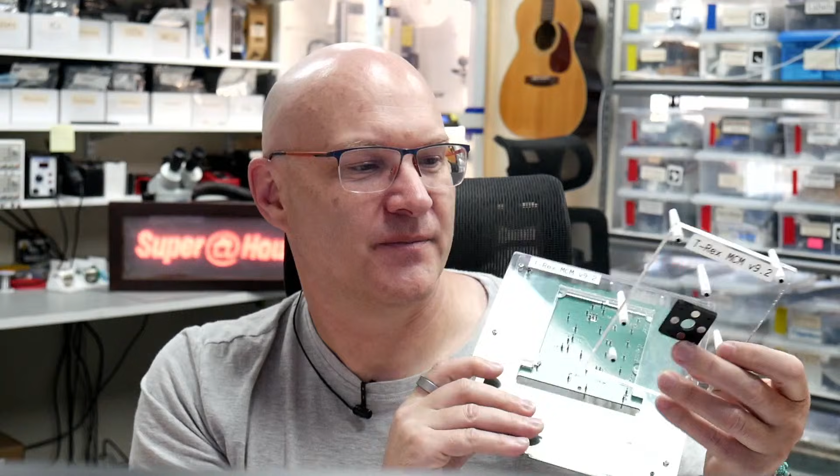But long enough that they reach a steady state temperature, and then with the thermal camera be able to detect how hot they are. So doing that with the pressure plate in the way, which is going to be like this over the top, and then other parts of the structure as well. Oops, that goes like that. So we need to be able to see the board that is under the pressure plate and get a thermal image.

And also remember, clipped onto this magnetic latch in the middle is a big mechanism that is the pressure mechanism. So there's all of this mechanical structure in the way on top of the board that prevents you getting a clear view of the top of the board with either an RGB camera or with a thermal camera. So that is a problem that I do not have a solution to.

Yeah, Tinker said, I think TTS will catch up with Tinker in just a second. Evil D says, when I was looking... Oh, okay. 001 said, specific locations on a board would be most likely to show excessive heat first. Yeah, that's right, absolutely. I agree. So putting a thermal camera in a location that just has a view of a small part of the board may be the solution. But I really would like to be able to get an overview of the board. But yeah. Oh, Wagonlow says your particle sensor should detect magic smoke.

It should. Evil D says, when I was looking at fire detection for my lasers, I ruled out thermal and smoke for obvious reasons. If I recall correctly, I decided on IR, diff frequency to the laser. That was a few years ago and I still haven't built it. Okay. At Tinker001 said, temp sensors instead of cameras. Yeah, and as this is going back in chat, I missed this a little bit. Tinker said, possibly put temp sensors in useful locations on the carrier PCB.

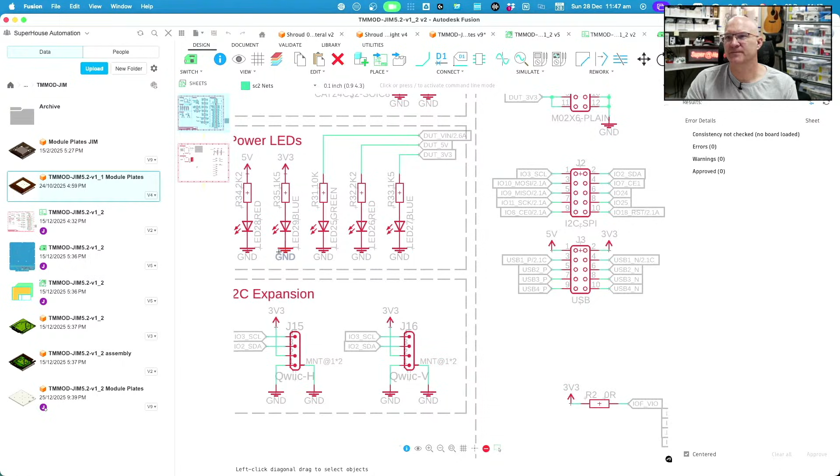But one thing that has come out of all of this is that I have made a decision. And this decision is likely to make Austin happy. This decision is that I'm going to put, where is it? It must be further along here. More squirrels. Yeah, I'm going to put Qwiic connectors on all of my test pin carrier boards, just by default from now on. Because what I realized is that external sensors, things that I might want to attach to the pressure plate, for example, or other devices, will probably need to plug into the test module.

So what I'm going to end up with is, I better grab the right one, this one, the test module. Hang on, back to this view. So I'm going to end up with the test module, which plugs into the chassis. It's got I2C brought up here to be passed through to a connector on the back. So there'll be the Qwiic connector on the back, and it may not be used, but it may be used in future. So if, for example, I wanted to do, not that pressure plate, this pressure plate.

Say I wanted to do a pressure plate that goes onto it that has a color sensor or an IR camera or whatever, it doesn't really matter. I2C is there, and then this can be plugged in, and I'll have the module with the pressure plate tethered by the I2C cable, and that electrically is a single unit, even though it consists of two parts. It's mechanically got the test module and the pressure plate, but they can still all be connected through the same edge connector to the test-o-matic chassis.

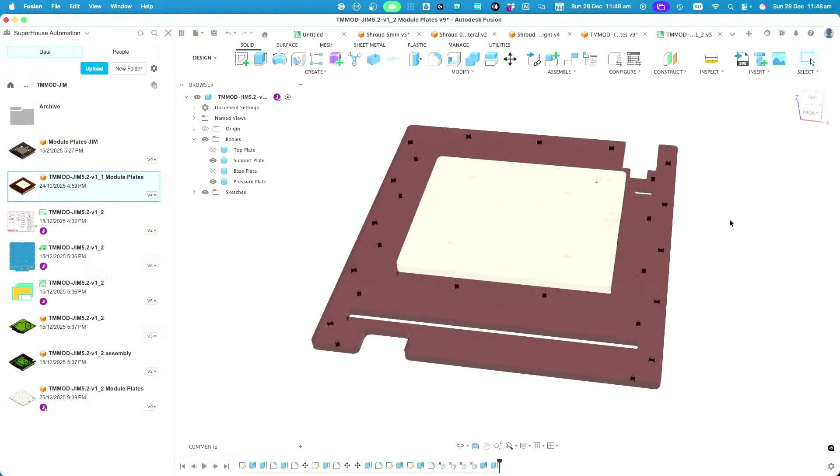So I'm regretting that I didn't put them on earlier. I know Austin for ages has been saying, yeah, put Qwiic connectors on, they're great. And I've been ignoring him. I should not ignore the wisdom of Austin. Tinker001 said, always better to have the cheap option built in than to discover the need later. Yeah, that's right. So from now on, I'm going to include those on the test pin carrier boards.

And for this, I'm going to retro bodge patch fit one onto this board without revising the PCB. So I actually have revised this PCB. In fact, this is the JIM version 1.1 test module. This is the version 1.2. And the difference is it includes the Qwiic connectors on it. This one that I have in my hand doesn't. So I could send this PCB off for fabrication, and I might, but in the meantime, I'm just going to patch one onto this existing PCB, which will allow me to test the idea before incurring more expense.

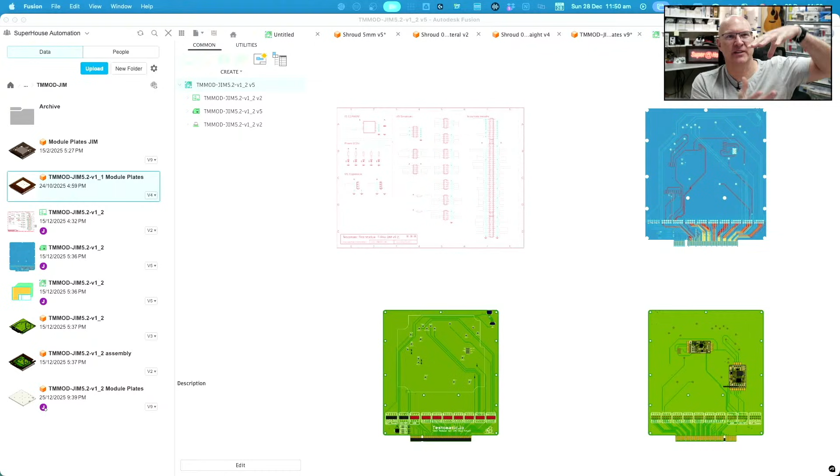Yeah, so, Wagonline says, can you or will you need pogo pads for I2C for easy connect? That's an interesting idea. It could be made so that when the pressure plate descends, yeah, I see where you're going with that. I think it would add potential failure points and more complication. It's an interesting idea though.

I2C breakout board on there. Hot glue a Qwiic breakout. Yeah, that is almost what I'm going to do, except that I'm going to get an actual connector. So what I'm going to do is scrape back the solder mask to the ground plane and solder the mechanical mounting pads of a JST 1mm connector on there, and then patch wires onto the pins of the connector. So it should end up being a fairly neat sort of job.